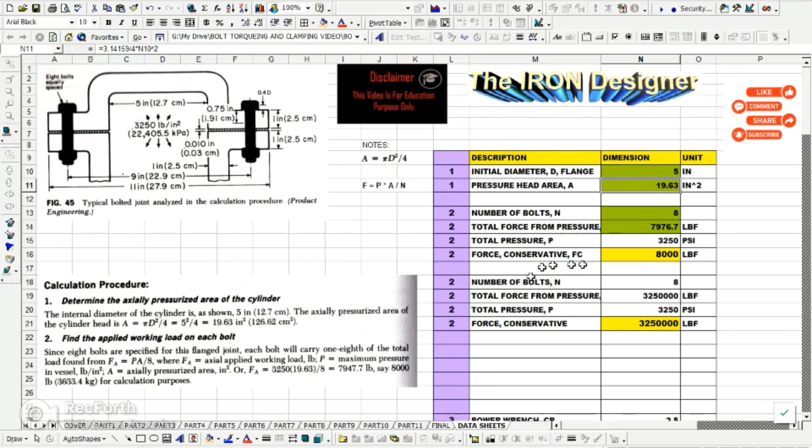So we're going to jump back and forth between the screens so we can make sure that what Tyler Hicks did is actually coming out with the correct value. We're going to jump to data sheets and then back to the calculation, back and forth. At the end, I summarize it all up in a final setup.

This is where I'm going to play the what-if. And if I need to print this out for someone, it's formatted so they could visually see it as a printout. That's why I kind of duplicate my work, because as an engineer, you need to communicate with other engineers, your client, your customer, or your manager. So part 1 is done, and we have verified the value.

In this part of the calculation, we're going to find the applied working load on each bolt. This is critical in order to make the connection sustain the load. Since 8 bolts are specified for this flange joint, each bolt will carry 1/8 of the total load found from FA, the force on the area.

That's defined as the pressure times the area divided by 8, where FA is the axial applied working load in pounds, P is the maximum pressure in the vessel in pounds per square inch, and A is the axially pressurized area in inches squared.

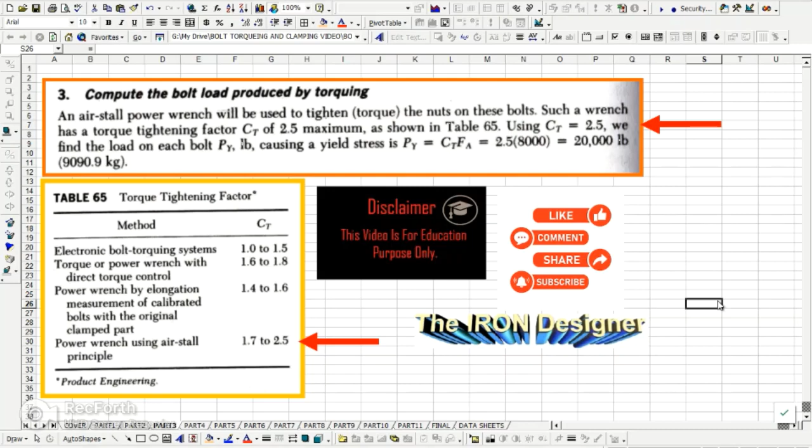Now we're in part 4 of the calculation, and I want to show you in the data sheet that these numbers correspond to the numbers in the question. As I'm going down, part 3 is being calculated here - you see the 20,000 pounds and the 2.5 from the CT value in the table.

And now we're here in question 4, so you see I have the 4s here. It talks about the yield ratio and the expected yield strength. So we'll go back to part 4: find the ultimate tensile strength PU for the bolt.

With the yield strength typically equal to 80% of the ultimate tensile strength of the bolt, then PU is equal to PY divided by 0.8, which is equal to 20,000 divided by 0.8, which equals 25,000 pounds.

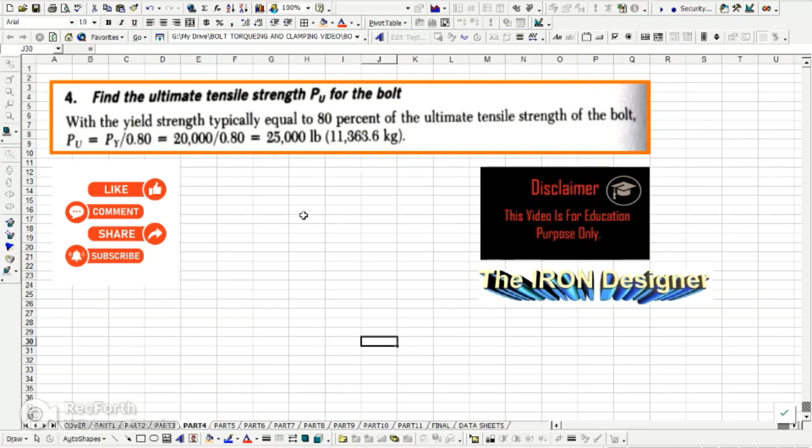Now in section 5, we determine the required bolt area and diameter. We're going to select a grade 8 bolt having an ultimate strength of 150,000 pounds per inch squared. The nominal bolt area must then be AB equal to PU divided by U, which is equal to 25,000 divided by 150,000, which equals 0.1667 inch squared.

From a table, when we calculate the diameter, we get dB equals the square root of 4AB divided by pi. We get a diameter of 0.4607 inch, so we have to raise that up. The closest standard bolt size would be 0.5, and you choose a 1/2-13 UNC bolt, keeping in mind that coarse thread bolts generally have stronger threads.

Some debate whether fine thread or coarse thread is stronger, but we're going to go with this because we have a data table to take a look at these data values.

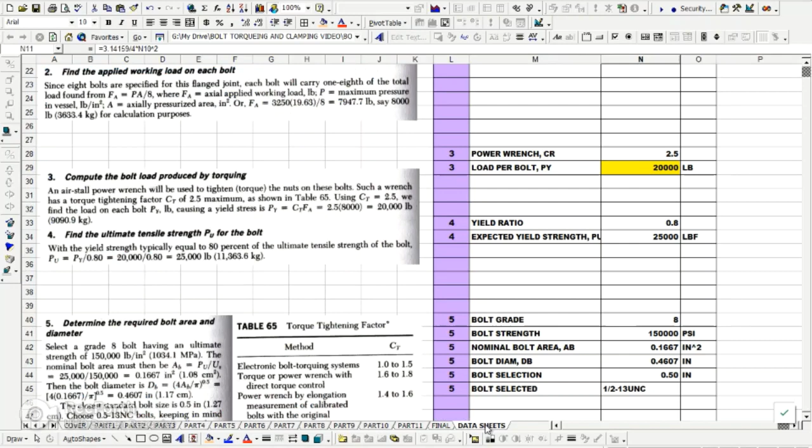Back over here in the data sheets, that's exactly what I've done in this section. You have the bolt grade is 8, the bolt strength is 150,000 psi, the nominal bolt area, and all this is computed - you can see the values. Then I compute this value, which is the theoretical bolt diameter, and you can see the formula computed here.

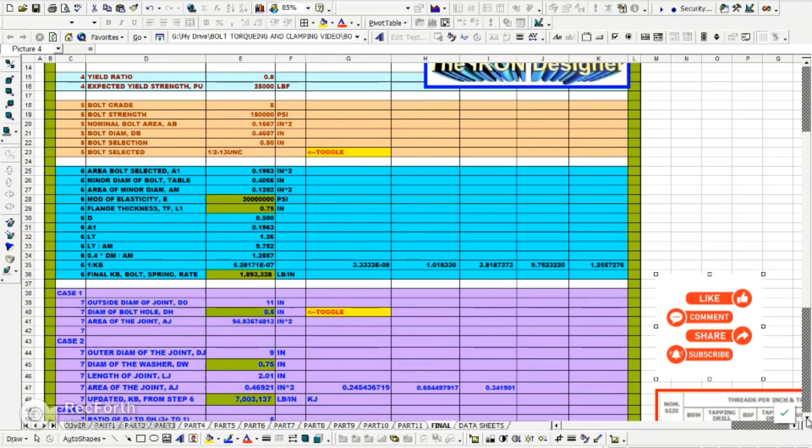Then here I use the Excel ceiling function to raise this up to the next highest value within every 0.5 increment, and then the bolt selected I manually input because it's in the table. The table, which you can find all over the internet, shows you have the 1/2 inch bolt, and you don't use the BSW, that's the British. So we go across here to the uniform American sizes - you have half-13 UNC, and it gives you other metric data. When you go back to this, you'll see in the past they just said NC, but the data is the same.

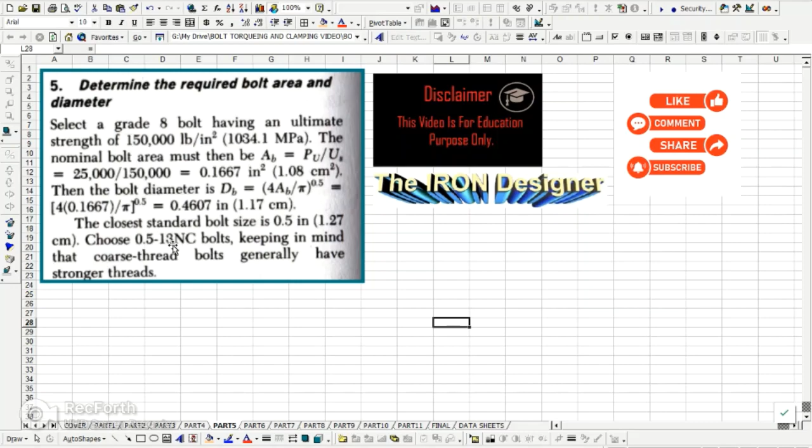Now, what we want to do is find the spring rate of the bolt that we've selected. The general equation for the spring rate, K, in pounds per inch, for a part under tension loading, is K equals AE over L, where A is the part cross-sectional area in inches squared, E is the Young's modulus (30 million pounds per inch squared in this case), and L is the length of the section in inches.

We're going to find the spring rate of a part with different cross-sectional areas, as a bolt has, and add the reciprocal of the spring rate of each section. So 1 over K total equals 1 over K1 plus 1 over K2, and so on, until all the different cross sections are included in the overall total reciprocal of the spring rate.

For a bolt which consists of 3 parts—the head, the unthreaded portion, and the nut—the spring rate determined by Junker, a consultant with Unbrako, is given as 1 over KB equals 1 over E times 0.4D over A1, plus L1 divided by A1, plus LT divided by AM, plus 0.4dm divided by am, where d is nominal bolt diameter in inches, a1 is the cross-sectional area of the unthreaded portion of the bolt in inches squared, am is the cross-sectional area in inches squared of the minor threaded diameter dm, and L1 equals the length of unthreaded portion.

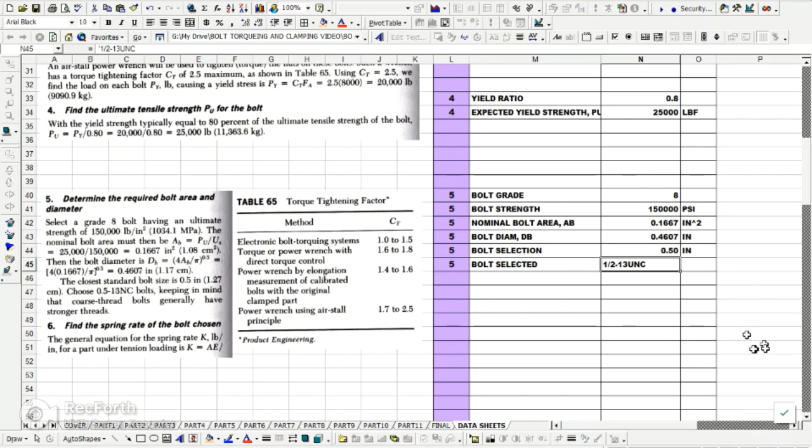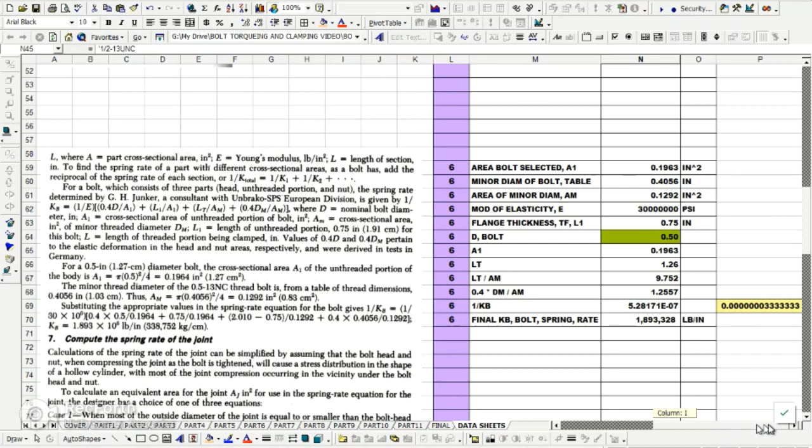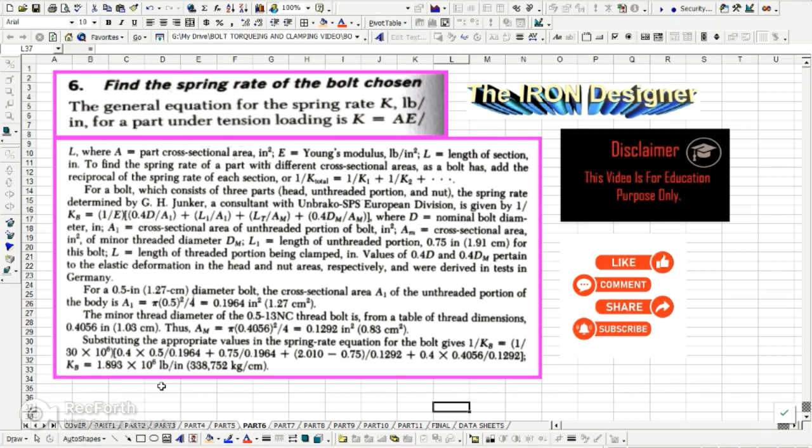When you look at my data sheet for section 6, I've plugged in all the values and did the work on the side here. These are the components of the calculation, and then I sum them up according to the formula for the reciprocal of the spring rate of the bolt for the multiple components and parts of the bolt. When I take the value of KB, you have here exactly 1.893 million pounds per inch, exactly like in the example.

So we're now in part 7. It's also a bit lengthy, but it's not that complicated. What you're going to do here is compute the spring rate of the joint. So first we did the spring rate of the bolt, and now we're going to look at the spring rate of the joint.

Basically what they're saying at Unbrako, and I can read it to you: the calculations of the spring rate of the joint can be simplified by assuming that the bolt head and the nut, when compressed against the joint as the bolt is tightened, will cause a stress distribution in the shape of a hollow cylinder, with most of the joint compression occurring in the vicinity under the bolt head and the nut.

So what they're saying is, if we go back to part 1, that when the bolt tightens up on the flanges, this creates a cylinder of force all the way through. I've seen other textbooks where they say it actually creates a cone underneath here, like an inverted cone going up. In this research done in Germany, they found that it's not a cone—although other research shows it is a cone—that it's a cylinder acting directly through and parallel to the body of the bolt.

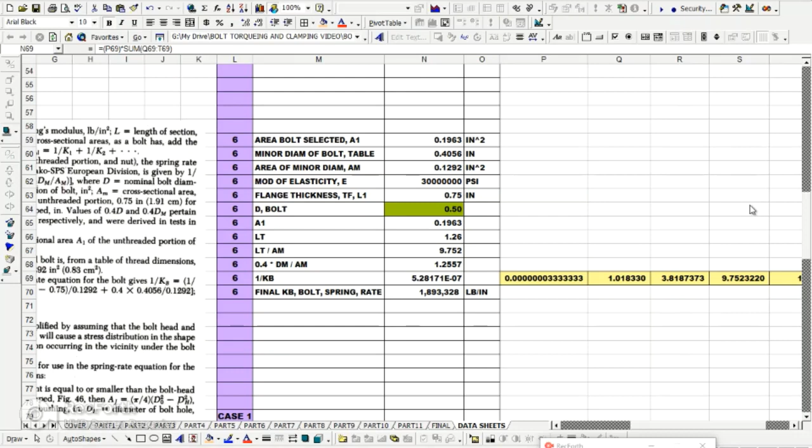So here we are back in the data sheet tab, and I just wanted to go down and show you the calculations for the cases that I did. What's happening is you're getting these different areas, and I think what the author wants you to find is the smallest one. So if you're looking at the entire joint, you get 94.83 inches squared, which is very large and definitely not something you're interested in.

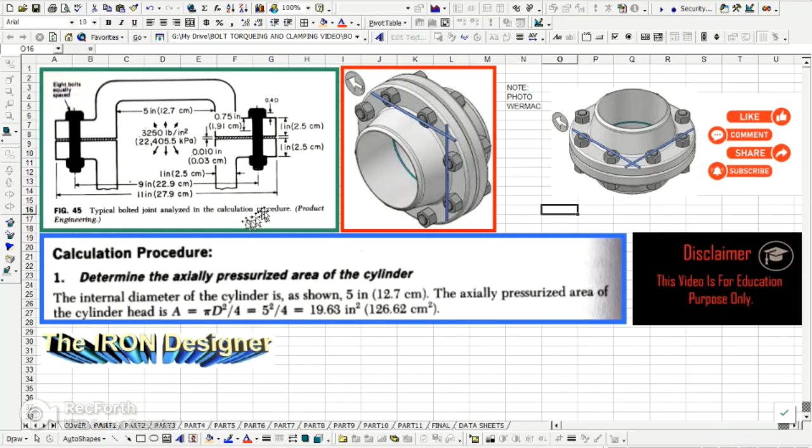If you look at case 2, which is what they recommend, with an outside diameter of the joint along the center line of the bolt pattern, the center line of the bolt pattern is 9. If you look at the total outside of the entire joint, it's 11. So when you look at my calculation, that's where this 11 is coming from, and that's where this 9 is coming from. And when you do the case 2 calculations, you get the smallest area of the joint.

Remember, they were talking about a cylindrical pattern where the force is in parallel through the joint through a cylinder created by the bolt. And then, of course, case 3 has a larger area of the joint, AJ. And so that's why I'm not using that value. I'm using this value. I believe the author wants the smallest value to be used.

And off here to the side is where I have the computations of the different portions of the calculation. So in 7, there's this portion, then a middle calculation, and then this last calculation. So then I assembled it all according to the way the formula is. And then here you can see the result is 0.4692, and in my data sheet it's here, 0.46921. Okay, so I always show you all my numbers and where they come from.

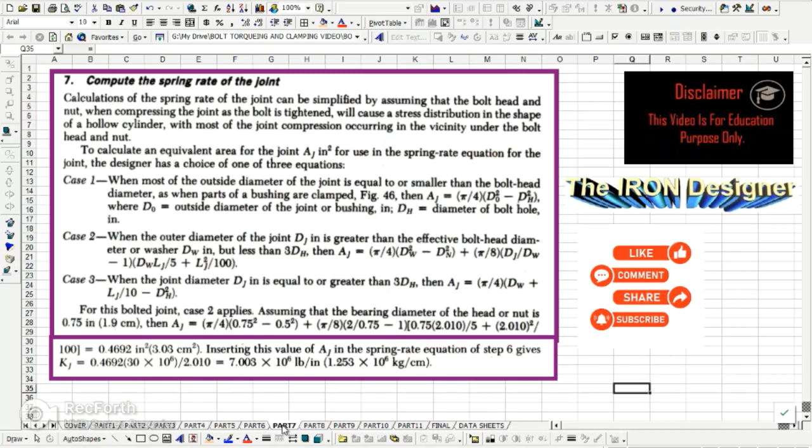In section 8, we're going to find the portion of the working load that unloads the clamp joint. Remember, the author said that sometimes the bolt head will embed itself into the flange, and this embedding allows the bolt to stretch. They're saying that in their tests in Germany it's about 10% of the joint connection is due to embedding and compression. So they're saying the loading constant CL considers the bolt and joint elasticity and is given by CL equals KB, which we computed previously, divided by KB plus KJ, which we computed previously.

For this joint, CL is, they divided the numbers by 1,000. So remember, this used to be 1.8 million, 7.003 million. They just divided by 1,000 to make the calculation easier. It's still proportionally the same. And they get a value 0.2128.

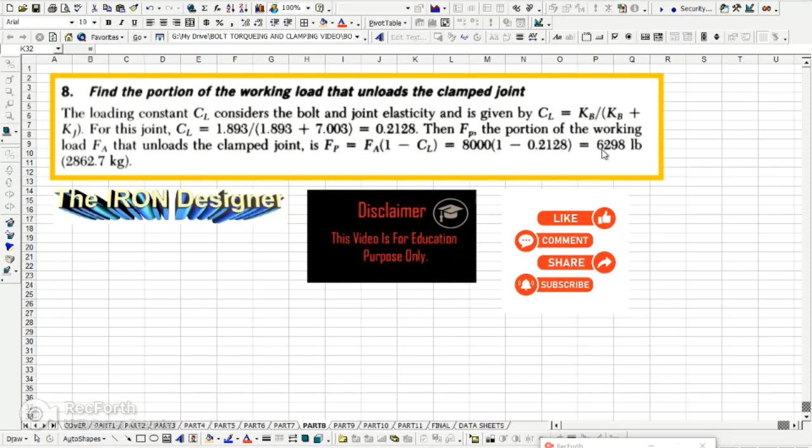So then the FP, the portion of the working load FA that unloads the clamp joint, is FP equals FA, 1 minus CL, which is 8,000 - if you remember, that was the upgraded value from the bolt forces - times 1 minus this loading constant, 21.28 or 0.2128, equals 6,298 pounds. So now the clamp joint is not clamped to the full 8,000, it's clamped to this 6,300 value here.

And in my data sheet section 8, that's exactly what we get. We have the loading constant computed by formula. We have the original KB. We have the new values that are reduced by 1,000. And we're computing the unloaded force. So really, what they mean is this is the force minus the take up from the embed. And this is the remainder of the clamp force load.

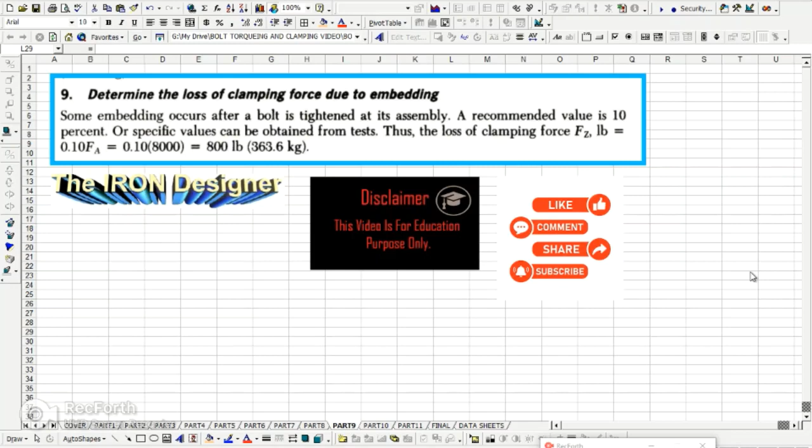So I did kind of give you a look ahead here in part 9. Determine the loss of clamping force due to the embedding. Some embedding occurs after a bolt is tightened at its assembly. A recommended value is 10%, or specific values can be obtained from the test. Thus, the loss of clamp force Fz in pounds is equal to 0.1 times Fa, which is about 800 pounds of clamping force embedment.

And in my data sheet in section 9, that's what I've computed here. Just based on their recommendation, I just plugged in the value and multiplied it times the original clamp force without the clamp reduction, without the unloading force.

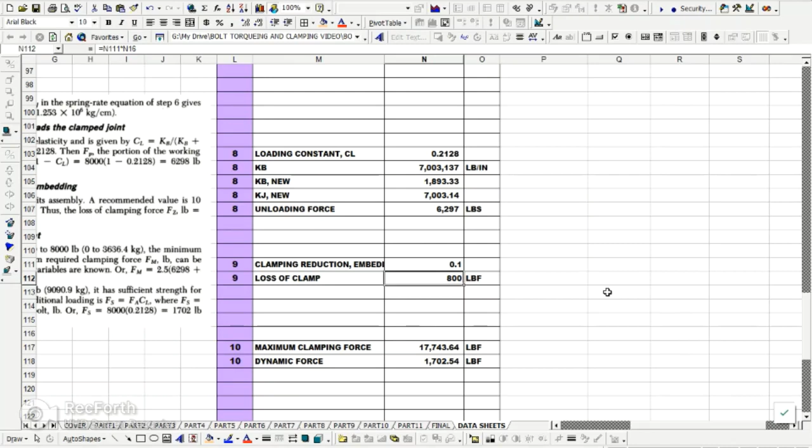So in section 10, we're going to find the clamping force required for the joint. Since the working load in the vessel fluctuates from 0 to 8,000 pounds, the minimum required clamping force would be 0 at a fluctuating force of 0.

But the maximum required clamping force Fm in pounds can be found from the formula Fm equals Ct times Fp plus Fk plus Fz. Plugging in the values, Fm equals 2.5 times 6298, that was the force reduction on the clamp, plus 0 which would be Fk, the starting pressure force, plus 800, which is the embedment unloading load. You get 17,745 pounds. Since the bolt has a yield strength Py of 20,000 pounds, it has sufficient strength for static loading.

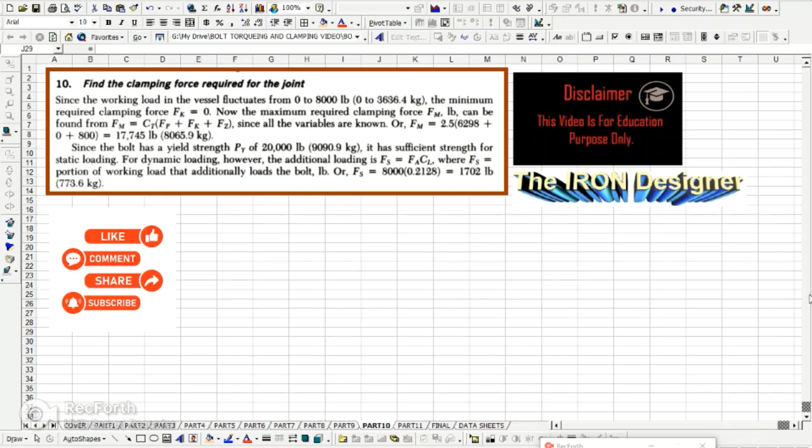But for dynamic loading, the additional loading is Fs, which equals Fa times Cl, where Fs is the portion of working load that additionally loads the bolt in pounds. Fs equals 8,000 times 0.2128, which equals 1702 pounds. As you can see in my data sheet, I've accounted for those calculations from section 10, and there's the value they're calling the dynamic force of 1702 pounds.

Next, we're going to look at the endurance limit, and we're going to determine that the bolt we originally selected from the upsizing area calculations is insufficient to withstand the load of endurance and the fluctuating pressure.

So here, in checking the endurance limit of the selected bolt, the endurance limit SE in pounds should not be exceeded for long life operation of the joint. Exact values of SE can be obtained from the bolt manufacturer or computed from standard endurance limit equations. For grade 8 bolts, SE equals 4600 times D raised to the 1.59 value, or SE equals 4600 times 0.5 raised to the 1.59, which is

1,527 pounds. The value for Fs computed for the half-inch bolt is actually 1,702, and should not exceed the 1,527. Since it did exceed that value, a bolt with a larger diameter must now be selected.

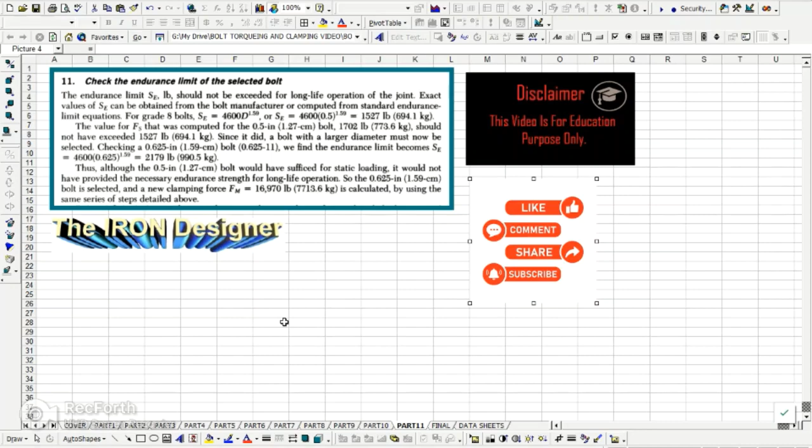So the new bolt size should definitely be the 5/8 bolt. Although the 1/2-inch bolt would have sufficed for static loading, it would not have provided the necessary endurance strength for long life operations. So the 5/8 bolt is going to be selected, and a new clamping force Fm now becomes 16,970 pounds, calculated by using the same series of steps detailed above.

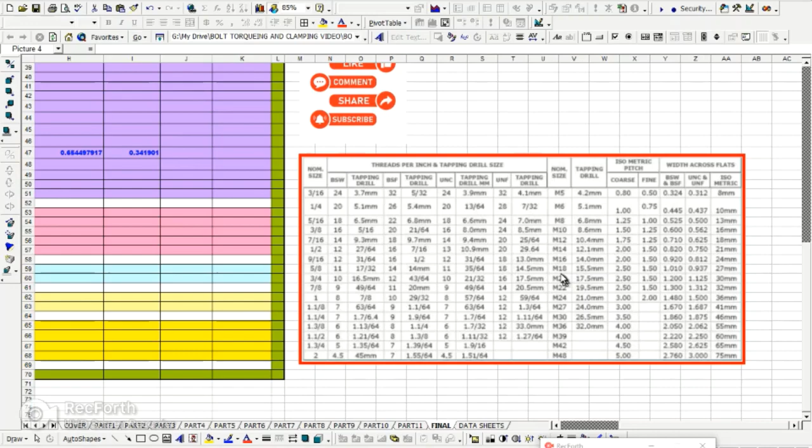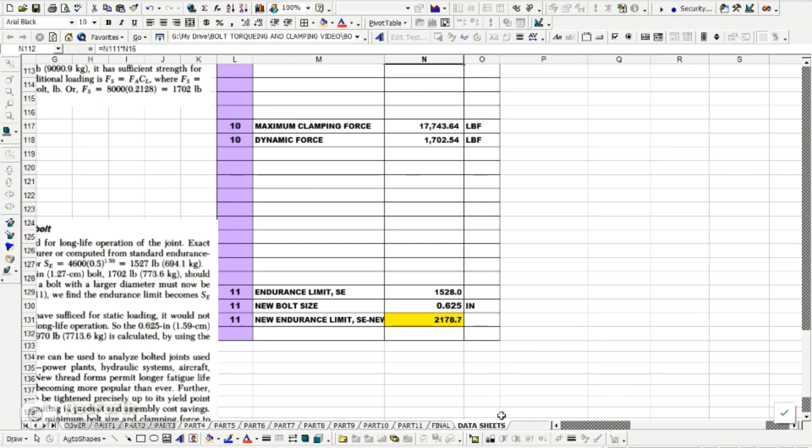So in closing, I showed you this table of bolt dimensions, but I wanted to come back and show you this here. This is the summary of the calculations that we did in the data sheet. So that other tab summarizes this tab here. And this is really what you want as an engineer, a professional engineer, so you can print things out.

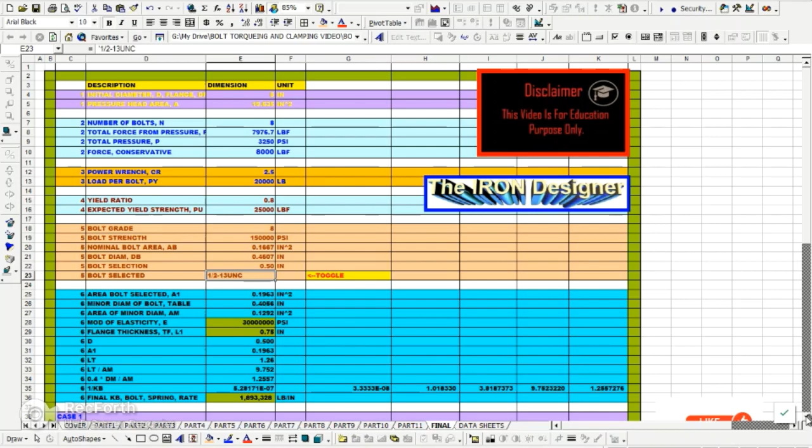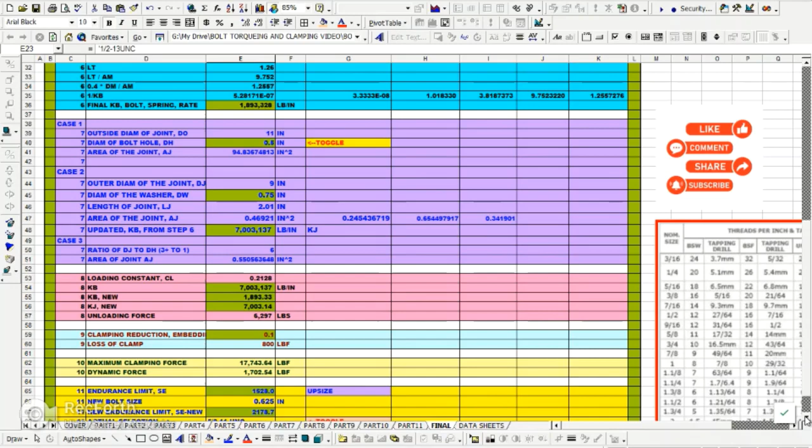So what you can do here, originally you see this toggle. Originally we had the 1/2-13 bolt, and in the toggle it's like a dashboard. You can do live modifications for your customers on demand, so you can see what the what-ifs are, and you can verify that things are changing.

So you can see that the original endurance limit for the 1/2-inch bolt was 1,528, and here I put in some if statements: if they're equal, say match; if one is less than the other, say upsize; and otherwise if it exceeds, then it will say exceed, meaning you are more than capable of doing endurance. Let's see if that works.

So here we've got the 1/2-inch bolt in the toggle. We're going to change that to 0.625 for the 5/8, and then we see now that the value says matches. Remember, before it said upsize. So this table is like a smart table, telling you that you need to upsize your bolt. When we upsize the bolt and change the value to 625, now it says matches, meaning the value of endurance is matching the value of the bolt's endurance limit.

What happens if we put in a larger bolt? What happens if we put in a 3/4 inch bolt? So we put in 75 here, and now the table has changed to exceeds, and the value is now 2911, which is far larger than the endurance limit required for the 5/8.

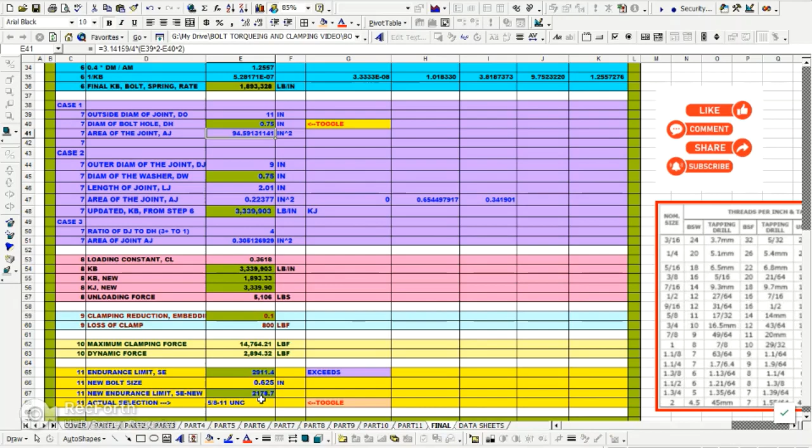So that's some of the things you can do when you're doing your calculations as a professional engineer.